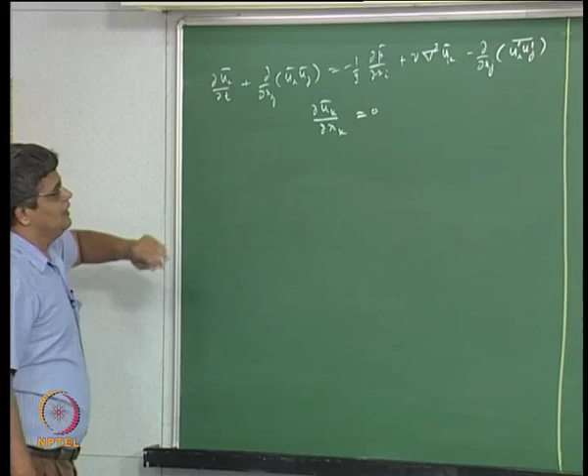When you look at these Reynolds averaged Navier-Stokes equations, we find that these are expressed in terms of the time average velocities and the time average pressure. Even the diffusion term here contains the time average velocity, so that if one were to neglect this, we would be expressing the momentum equation and the continuity equation in terms of time average quantities, and it's these time average quantities which enable us to make assumptions of steady state or one dimensionality or two dimensionality of the flow.

Now the set of momentum equations is not complete without this extra term, and for each equation there are three such terms appearing in the momentum equations. There are no additional terms in the time averaged continuity equation.

We have also made the point that these additional quantities involving the product of the fluctuating quantities cannot be neglected straight away, because for the case of steady one dimensional fully developed flow, the x momentum equation will reduce to: all the left hand side quantities become zero, equal to minus 1 by rho dou p bar by dou x, which is a constant when we have fully developed steady flow in one direction, plus nu dou square u bar by dou y square coming from this. The other quantities are zero, and the only non-zero quantity here will be dou by dou y of u prime v prime bar.

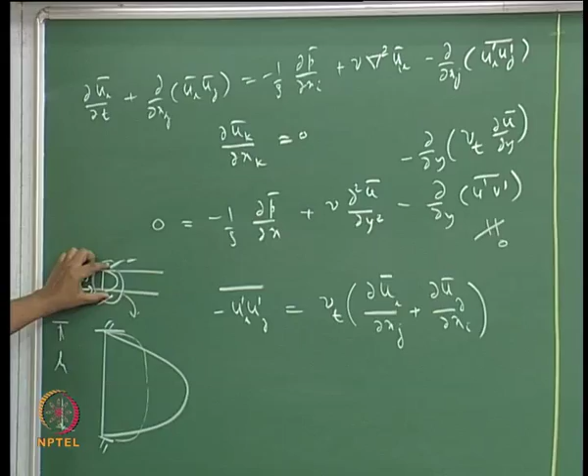Under these conditions, the equation governing the velocity profile can be written as: 0 equals minus the pressure gradient, which is a constant, some given constant C, plus d by dy of nu times du bar by dy. Since minus ui prime uj prime equals nu t times this term, with the minus included, this becomes plus nu t du bar by dy.

We notice that u is a function only of y, so we can replace the partial derivatives with total derivatives. We can say d by dy of (nu plus nu t) times du bar by dy equals a constant.

If you put minus here, this becomes a constant, which is given for driving the flow. This comes from the boundary conditions: the pressure at this end is this much, pressure at this end is this much, and the pressure difference between the two is driving the flow. So this is a given constant.

Nu is a property of the fluid, so this is known. In order to solve this, we need to know nu t, the turbulent viscosity or turbulent kinematic viscosity, which is used to model these additional terms representing the turbulent momentum flux.

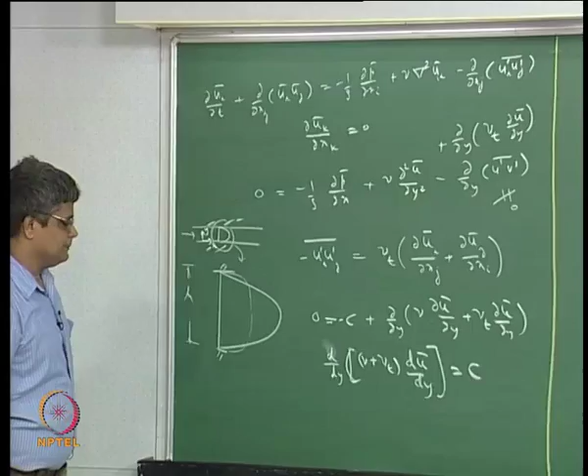Now what can we say about this nu t? We know that turbulent momentum flux adds to the momentum flux coming from viscous forces, so the overall turbulent transport in turbulent flow is greater than what we have, which we know from increased friction factor. One possibility is to say that nu t by nu is some constant C1.

C1 may be, for example, 5 or 10 or 100, whatever it is - the transport is increased by a multiplicative factor C1. This C1 is what we want to input so that the pressure gradient computed from this, or the volumetric flow rate for a given pressure gradient, matches with the experimental one.

So one possibility is to prescribe a constant value for the turbulent viscosity, such that the pressure drop versus volumetric flow rate, for example in turbulent flow through a pipe, is honored. Essentially we are increasing the friction factor by a certain multiplicative factor. That kind of thing is okay for predicting either the total flow rate or the pressure gradient, given that the other component is given.

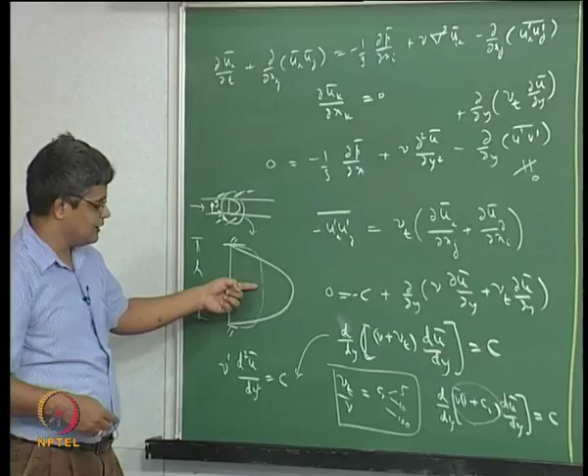So in order to go from this kind of profile to this kind of profile, we have to make nu t a function of y in this simple case, so that when this function of y acts on this profile, we will bring it back into this through this equation.

Now what kind of functional variation can we ascribe to nu t? For this we need to know more about these additional terms - these quantities. Instead of calling these quantities, let us from now on call these turbulent stresses.

These are also called Reynolds stresses for obvious reasons. These arise from time averaging as per the Reynolds decomposition of the velocity into a mean velocity and a fluctuating velocity. So these turbulent stresses, or Reynolds stresses, are being represented through this turbulent viscosity and through this kind of thing. So we need to know more about these turbulent stresses.

How can we know more about it? It is through experiments, because that empirical information of how to replace this as a function of the other variables can only come from empirical results, unless of course we take recourse to direct numerical simulation, and that is also being done to a great deal.

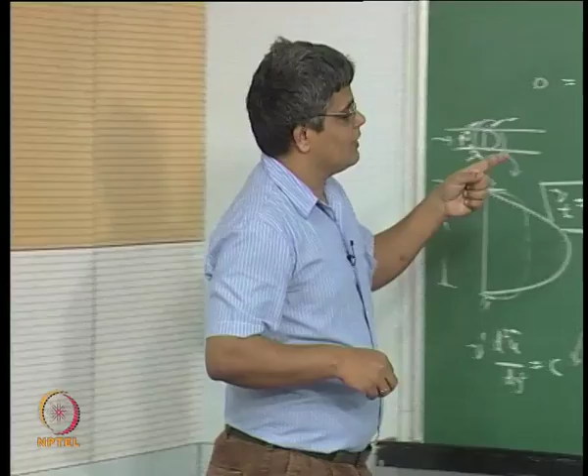So now what can we say about these turbulent stresses, ui prime uj prime, which are six in number? We are looking at a Cartesian coordinate system. So we have u prime v prime, u prime u prime, and of course u prime w prime, and then we have v prime w prime, v prime v prime, and w prime w prime.

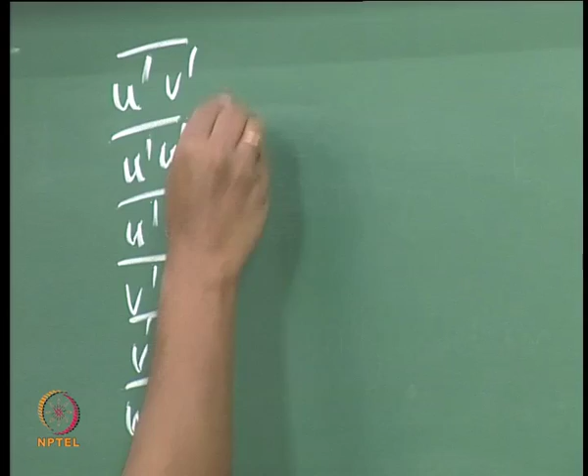There are six Reynolds stresses or turbulent stresses, and we would like to know how each of these varies in the general case with x, y, z, for a steady flow, because these are time-averaged quantities. These will be steady if the turbulent flow is steady, in the sense that the time-averaged flow parameters are steady.

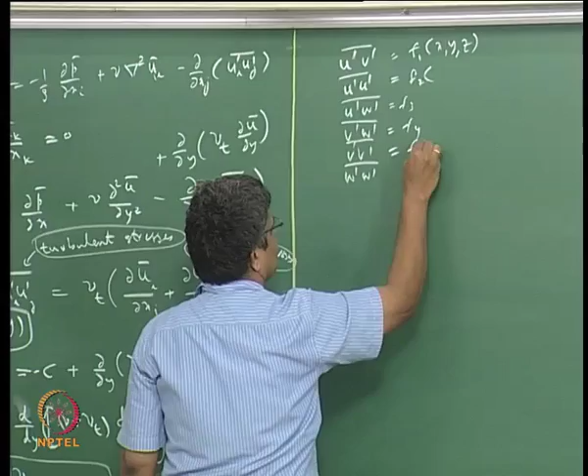So these are functions of x, y, z only if the flow is steady. So we will consider the steady case, and there is no reason to believe that all these are the same functions of x, y, z. So you have F1, F2, F3 like this, and these are what we need to know in order to replace these things coming in the momentum equations.

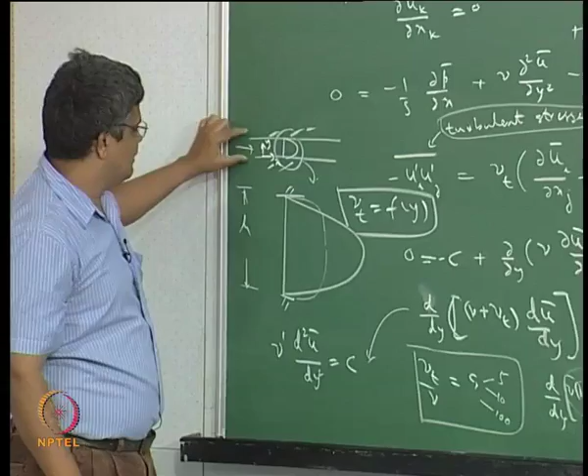Measurements tell us that the variation of these quantities, even in very simple flows, is very complicated. So the spatial variation of this, for example, if you take the simple case of fully developed steady flow between two parallel plates separated by a distance, in which the flow is being driven by a constant pressure gradient, you can plot these turbulence stresses as a function of y, the distance from the wall, and typically the stresses will exhibit a variation like this.

Most of these quantities, the normal stress components, these three will exhibit a variation like this, and you can see that it is not a simple variation like linear, second order, or exponential. Those kinds of simple variations are not there, because it is going through a peak and then coming down.

What is also very important is that if you were to look at the spread of this as compared to the channel width, y by h, then this peak occurs very close to the wall—it depends on Reynolds number, but it may be as low as 0.01. So within a small distance from the wall you may have a large peak, and then it behaves like this, and this is for one of these quantities, and another may be like this.

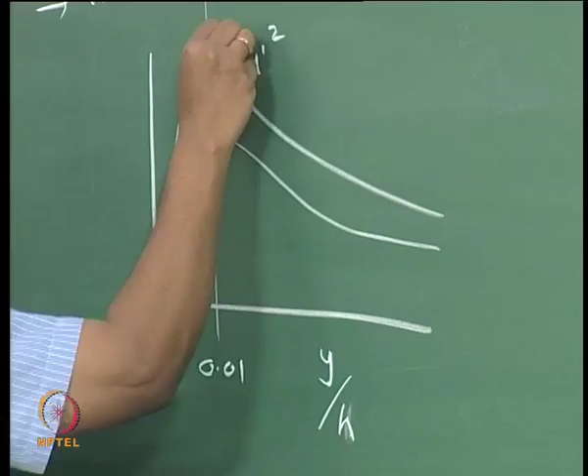So this may be u prime square bar, where u is in this direction—this is x, this is y, and this is z—and we are talking about a region very close to the wall, because we are talking about y by h of the order of 0.01, 0.05 like this, and the variation is not as simple as this.

This may be the variation of w prime square, and this is of v prime square. So that means all of them go through a peak, and then, as you go further and further away from the wall, they achieve an almost constant value. The magnitude of these quantities, on a non-dimensional basis, may be fairly small—of the order of 10 to 15%.

So what we are looking at is u prime RMS by u mean, where u mean is the average velocity through the duct, is of 10 to 15%, and this may be lower, and this is even lower. What we find is that there is a strong effect of the wall in this region, but as you go further away from the wall, it makes the turbulence more isotropic, in the sense that the three normal components have more or less the same magnitude, which may be of the order of 0.02 or so.

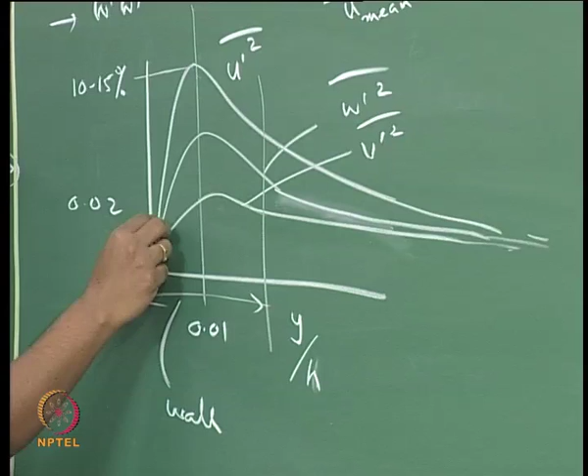So even for the simplest cases like one dimensional steady flow, very close to the wall, we find a variation which is fairly complicated. What we are interested in, what comes into the momentum equations, are not the values of u prime square and so on, but the spatial gradient of these, that is dou by dou x and dou by dou y of these quantities. Very close to the wall, all of them tend to go down to 0, and in that sense they exhibit a complicated variation.

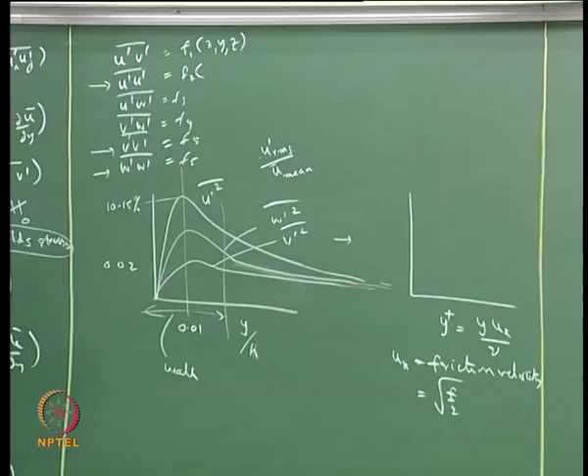The same plot is usually put not in terms of y by h, but in terms of y plus, defined as y u star by nu, where y is the normal distance from the wall and u star is known as the friction velocity, essentially the square root of f by 2, where f is the friction factor, such that f equals 16 by Reynolds number in the case of laminar flow. I would refer you to standard books on fluid mechanics and turbulent flow for this.

In such a case, what we find is that the peaking of these stresses occurs for y plus of around 10 to 15, and then it goes on like this. A typical maximum value of y plus, as you go from the bottom wall to the center, depends on the value of the friction factor. u star by u mean is square root of f by 2. As the Reynolds number increases, u star increases, but typically this maximum value may be around 5000 or several thousand, maybe 2000 to 10,000 or even higher.

So you have a very strong gradient of these stresses very close to the wall, and they exhibit highly nonlinear behavior in a small region, which is very difficult to capture in a CFD type of solution, because we normally use first order or second order accurate methods, and the accuracy is very sensitive to the actual gradient of the quantity.

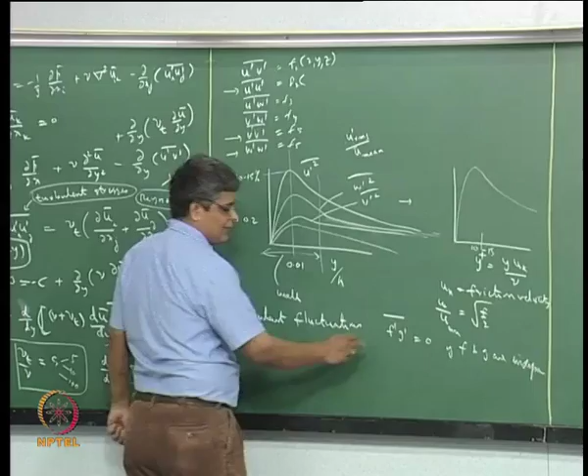Measurements show that not only are the normal stress components not 0, but even the off-normal stress components are not 0. So turbulent fluctuations are such that f prime g prime bar are not 0, and in a non-dimensional way they can be as much as 0.3. The cross correlation coefficient can be as high as 0.3 under certain cases, meaning there is some linkage between the fluctuation in u and the fluctuation in v, and similarly between v and w.

This linkage has to be captured by us in order to make this model. So what is this linkage? The linkage is such that a turbulent flow typically has a high degree of vorticity. It is not irrotational, it is highly rotational, which is a fluid mechanics way of describing this.

So turbulent flow is highly rotational, and in a pictorial way one can imagine as the flow goes through this duct, it is not going in streamlines, in straight paths. The fluid has these eddy-like structures, small whirlpools spread throughout the flow domain, and a particular particle, instead of going straight through, may go like this and then go off, then go like this, then go off like that.

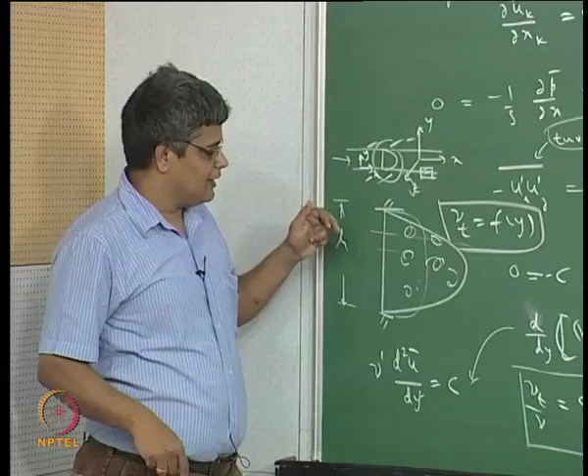So a fluid particle is not following a straight path in turbulent flow, it is taking a path which is highly irregular but has a strong degree of rotationality, and this rotational element is not there all the time, and it is not always small. It may be part of a bigger rotation or a smaller rotation, and it may undergo the rotation only for a short time or for a long time.

So typically what we express is that there are eddies, or small whirlpools, that a fluid particle encounters as it flows through in a turbulent flow, and these eddies are the cause, result, and the sum and substance of these turbulent flow correlations, because these eddies are fluctuating in the sense that they are formed, then they grow, then they decay. So they represent, in a way, the characteristic of turbulent fluctuations.

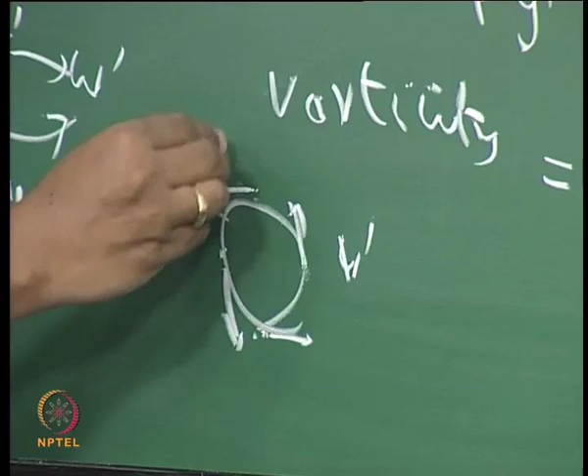For an eddy to form, a fluid particle here must go like this, and the fluid particle here must go like this, and a fluid particle must go like this, so that you can have an eddy-like structure. This means the v prime fluctuation here and the u prime fluctuation here must be correlated, so that as this moves, this moves. It is not exactly perfectly correlated, but on the whole one can see that for eddies to be present, there has to be some sort of correlation between u prime and v prime at several points.

At points within this, and also at the same point from time to time, and that is why these turbulent stresses, f prime g prime over bar, are not equal to 0. So the fact that this is not 0 substantiates an eddy-like structure in turbulent flow, and we must capture this. An eddy means that the fluid which is here is being mixed by convection with eddy from here, with the fluid here.

So this element will go quickly into this, and then it will mix and exchange the properties that it has. The property exchange between a fluid particle at this location and at this location can now come about, because these two fluid particles are brought together by convection, by the macro movement of the fluid particle from here to here in the turbulent eddy.

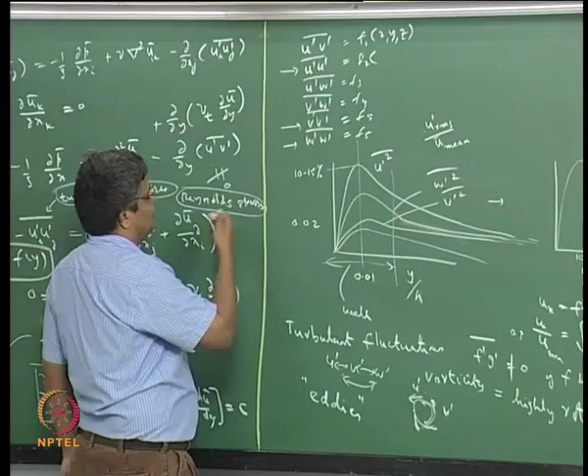If this were not the case, as per molecular mechanism, if the property of the fluid element at this point has to be exchanged with the property of the fluid element here, it is only possible through viscosity - this particle exchanges with this particle, and this particle exchanges with this particle, and so on. So it goes through several particles and several interactions before it can effectively interact with this. So there are a lot of middlemen between this trader and this trader in exchanging goods.

In trading goods, whereas in turbulent flow you are creating a railway path so that these people can travel up to this and then exchange goods. So the exchange and trading of goods between this particle and this particle is faster because you have laid a railway track and it is easy for them to go. You do not have to go through lots of middlemen who are exchanging and taking a long time.

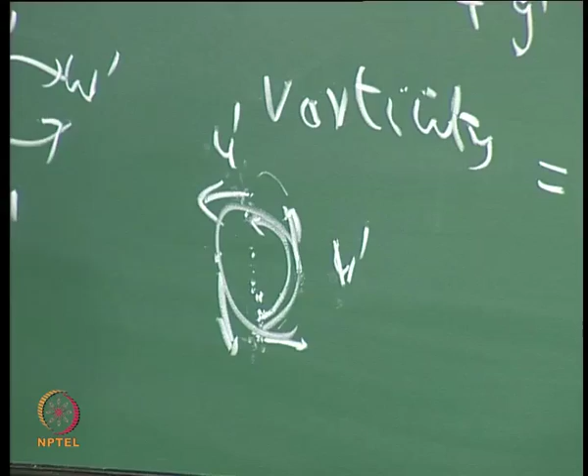So this is why the exchange of momentum and heat and all those things, the flux associated because of these differences, is much faster in the case of turbulent flow, and that arises from the fact that these eddy type of structures are present.

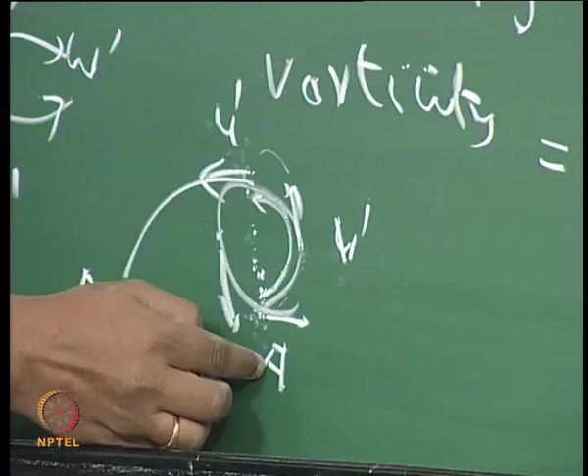Another characteristic of turbulent flow is that not only are there eddies like this, but eddies of different sizes are there, and it is these eddies of different sizes which actually give rise to effective mixing. For example, if you are looking at point A here and point B at this point, these two have to be mixed, and we are talking about for example a chemical reaction which happens at molecular rates, molecular distances.

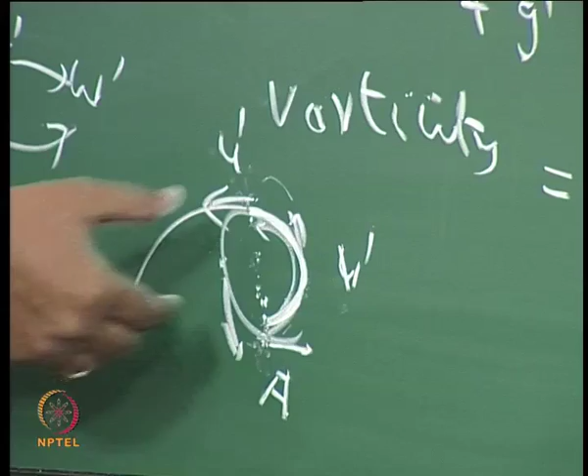Then this can mix, so all the fluid particles in this band along this sort of railway track will mix easily, but there is no mixing of this fluid particle with this fluid particle. So if you had only an eddy of one size, then mixing would happen only up to a certain length scale, and beyond that it has to depend on molecular mixing arising out of molecular collisions.

Whereas in turbulent flow you have eddies of this size, eddies of this size, eddies of smaller size, smaller size, right down to very small lengths, and the smallest length is determined effectively by the rate of dissipation of turbulent energy. It is determined by the action of viscosity on preventing those kind of very small fluctuations, and the largest size of the eddy is determined essentially by the physical dimension, the characteristic dimension of the flow domain - for example, the pipe diameter in the case of a circular pipe, or the distance between the plates in the case of flow between parallel plates, and typically the ball diameter in flow over a sphere.

So these are the characteristic sizes, characteristic linear dimensions, and the largest eddy size is typically a significant fraction, maybe 10%, 15% of the characteristic size of the overall domain, whereas the smallest eddy size is characteristic of the amount of dissipation of this kinetic energy associated with these fluctuations. That is, this plus this is a sort of kinetic energy of the turbulent fluctuations, and the rate at which that is being dissipated will govern the smallest eddy size.

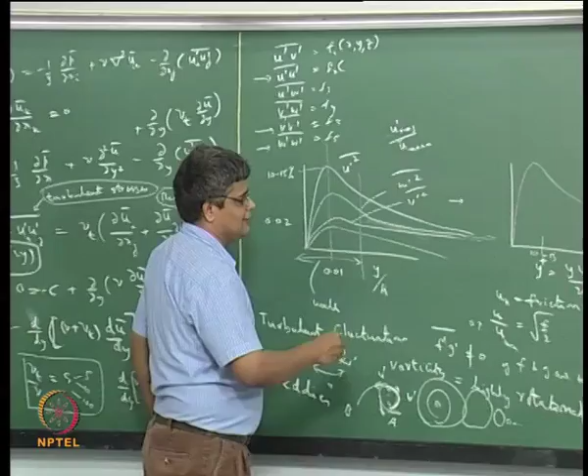Now what we want to say is that because you have an eddy of this size but also an eddy of this size and this size, mixing will happen not only at this length scale but also at this length scale, and also at this length scale. So that means mixing can happen right down to very small scales, and that is when we have true mixing. Otherwise, if mixing is caused only by one big eddy, then mixing will happen only in that band.

There won't be mixing between this particle and this particle. But if I have mixing not only like this but also like this and like this, I can see mixing happening over this, and these eddies are being convected by the flow - they are not stationary eddies. So this mixing that is happening here will transport further downstream, and that also causes mixing. And not only that, eddies of a particular size do not remain like that - they grow to a certain size and then they decay.

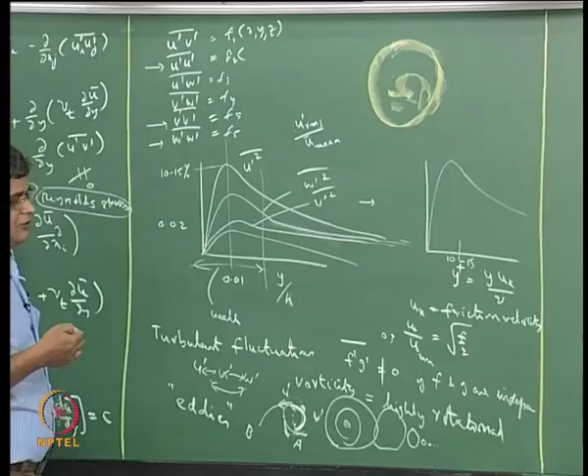Okay, so there are particular mechanisms by which eddies of certain size are created, and these eddies will slowly decay in size and then they go away. So you have a characteristic lifetime of an eddy and a characteristic size of an eddy, and these are random type of eddy structures which are continuously being created and destroyed, and which are exchanging energy with each other.

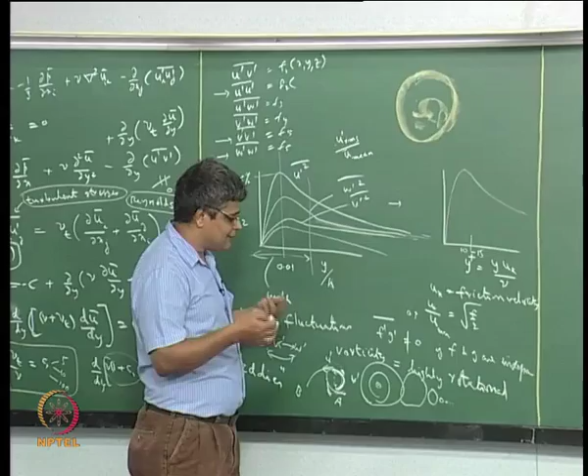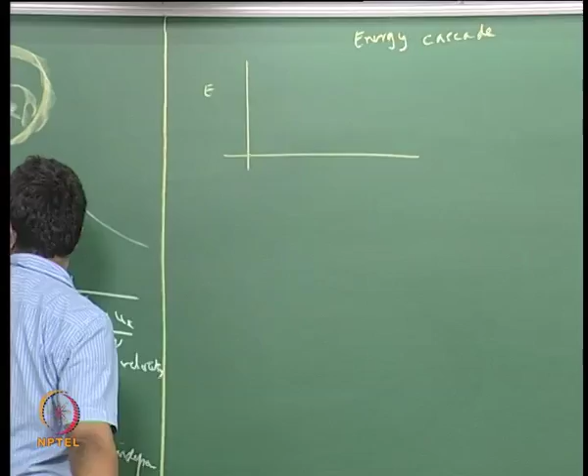And so this kind of thing is expressed very nicely in a pictorial form, in the form of energy cascade, which is very characteristic of turbulent flow. What we are plotting here is the energy, and this energy is turbulent kinetic energy.

And what we mean by turbulent kinetic energy is this energy is proportional to half of u prime square bar plus v prime square bar plus w prime square bar. So that is the kinetic energy associated with turbulent fluctuations.

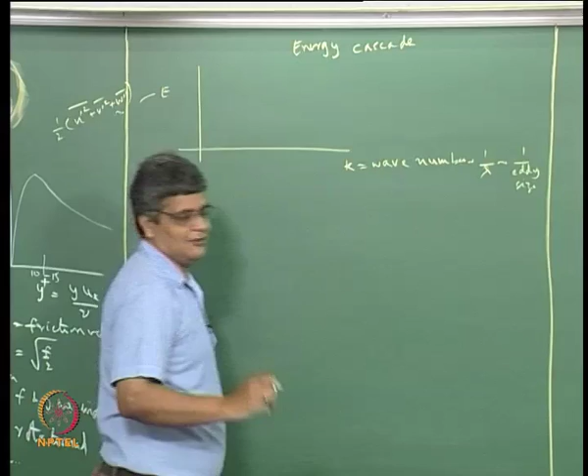So one can say that, and what we have on this side is either the wave number, which is proportional to 1 by lambda. So this is proportional to 1 by eddy size. These are not mathematically rigorous definitions, and one can look up standard textbooks to get a much better idea. But the essence of this is that when you have a large value of k, that means very small eddy size, and when k is very small, then you have large eddy size.

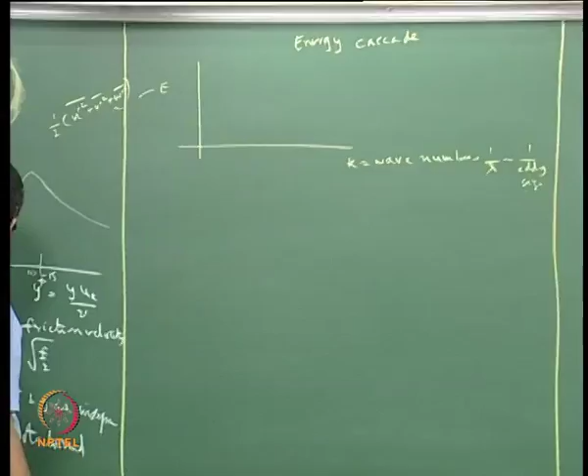So the largest eddy is fixed by the characteristic dimension of the domain, and if L is the characteristic length of the domain, then typically L by 6 is the largest eddy size, and you have the k minimum.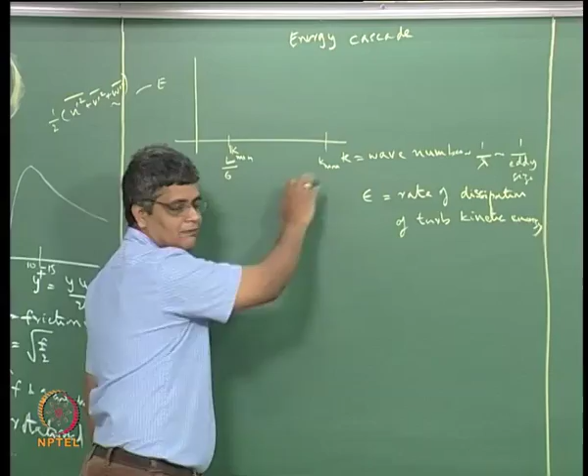This is fixed by the characteristic size of the domain, and then at the upper extreme you have k max, which is fixed by the rate at which this turbulent kinetic energy is being dissipated, usually given the symbol epsilon. So this is the rate of dissipation of turbulent kinetic energy. There are proper definitions for this, and we will get back to these things, but the higher the rate, the higher is the value of k max, or the smaller is the eddy size that is possible.

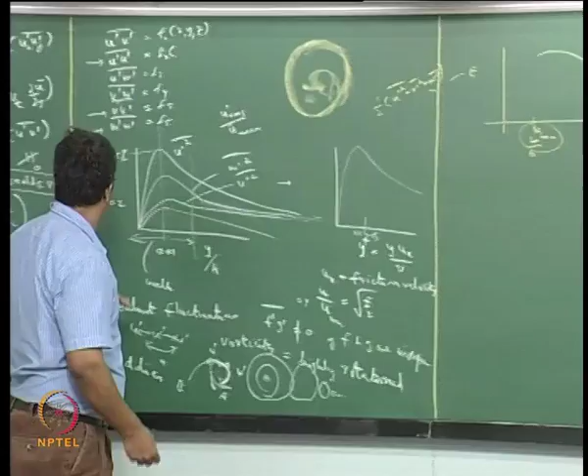So in between, the characteristic energy varies like this. The turbulent energy is produced by these large eddies, which are characteristic of the instability mechanisms happening in high shear regions. That is, high shear regions where you have large gradients of the mean velocity, which typically happens close to the wall. So that is why very close to the wall you have large values of this turbulent kinetic energy here, of the order of within 1% of the total characteristic length or duct size. So that is where most of the turbulent kinetic energy is produced, and then it is cascaded down in a characteristic variation.

This is a log plot, log of E and log of K. It is cascaded, transferred from the large eddy size to the next size, next size, next size, right down to the smallest eddy sizes. And when you come close to this k max, it is no longer possible to sustain these eddy sizes, and you have too much viscous dissipation of this fluctuation. Beyond this you do not have any fluctuations or energy associated with this. So this is the energy cascade.

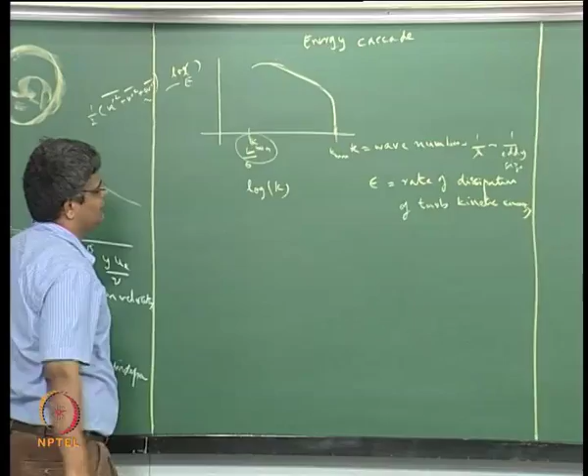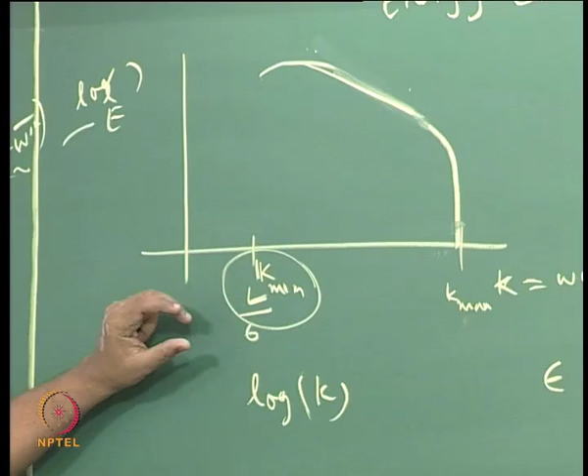So turbulence, the energy associated with turbulent fluctuations, is produced by eddies which are characteristic of the length size, of the order of the characteristic length of the flow domain, through mechanisms, instabilities which are created very close to the walls. These are called ejections and sweeps, and those kinds of phenomena which are taking place in turbulent flow. Although this is an instability, there is also a self-regulating mechanism by which this instability does not go into uncontrollable system behavior.

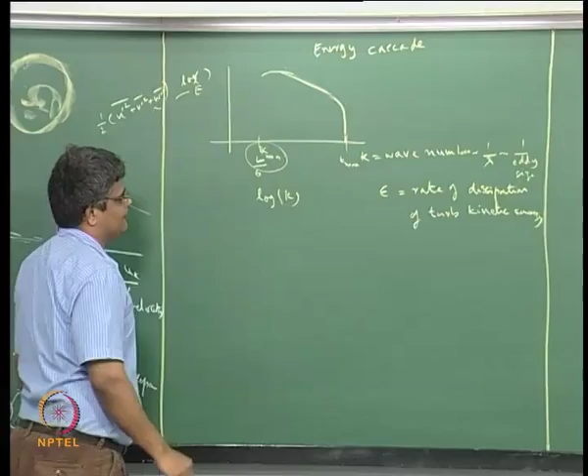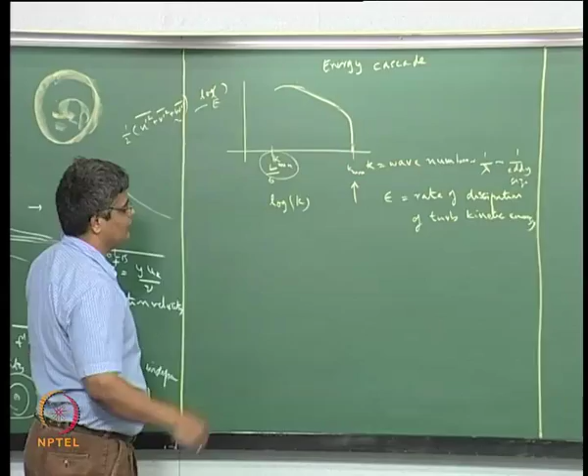So it is produced here, and then it goes down to the smallest length here. So it is this presence of the eddies and the exchange of momentum between eddies of different sizes which is characteristic of the energy cascade, and one can therefore say that if one were to characterize turbulence, then one possibility is to look at the lowest eddy size that can survive in the turbulent flow against viscous dissipation, and on the other side of the spectrum you have the largest eddy size which is characteristic of this.

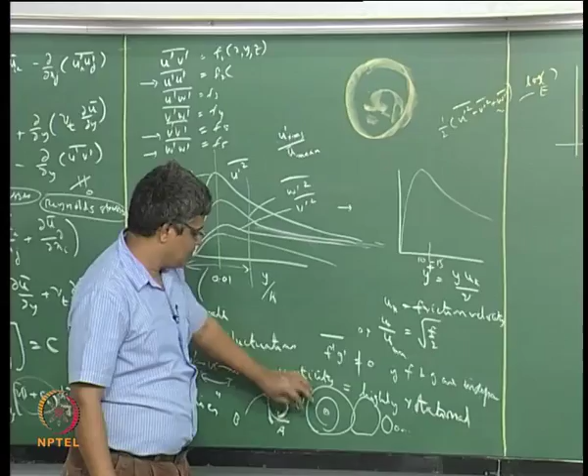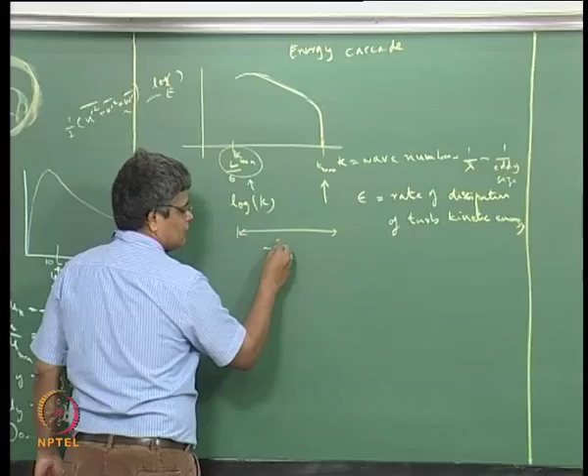So these are two reference points which essentially determine the range of eddy sizes and the characteristic features causing high turbulent transport of mass, momentum and energy in turbulent flow conditions. Typically for fully developed turbulent flow, for example Reynolds numbers of the order of 50,000 or higher, this variation can span a few decades - this can be of order 10 to the power 3, and this can be 10 to the power 6 or even higher. So K max by K min is of the order of 10 to the power 3, and similarly energy max by energy min may be of the order of 10 to the power 6, which essentially corresponds to measurable things like this.

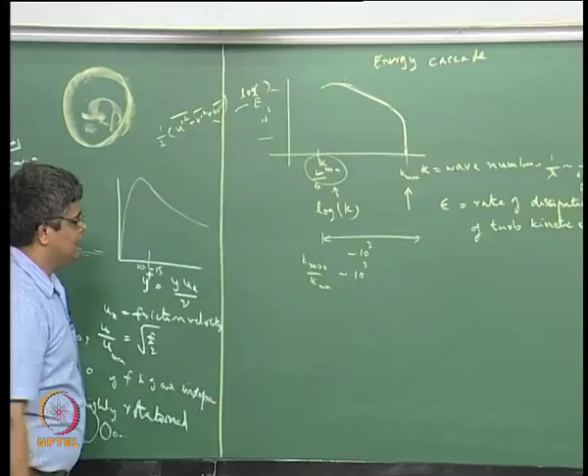What is especially important is this range here - that means fluctuations are possible of this kind. We've said this is the wavelength of the fluctuation, which is also loosely representative of the eddy size. So you can have wavelength of fluctuation associated with lambda max or K min, and you also have fluctuations associated with the smallest things, associated with lambda min.

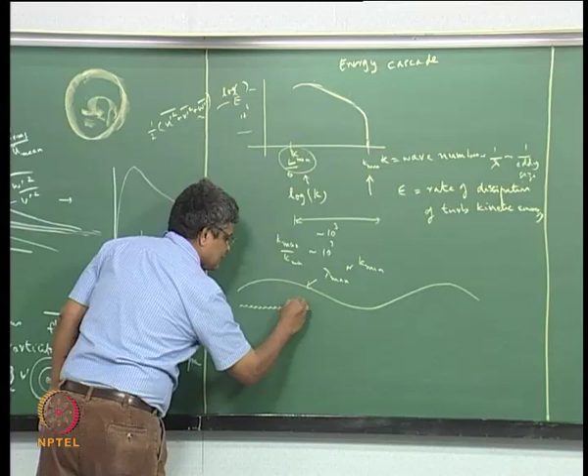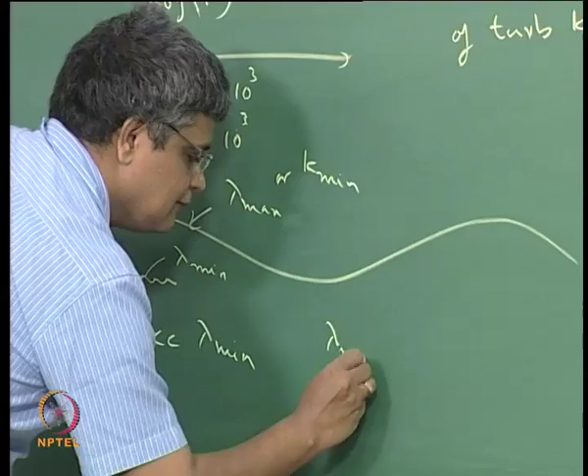Now if you want to do a proper turbulent flow calculation which captures the full range of turbulent fluctuations from the smallest size to the largest size, you must have a grid spacing much less than this lambda min - your delta x must be much less than lambda min. And we know that lambda max by lambda min is of the order of 1000, so the number of grid points to capture these variations may be of the order of 10,000.

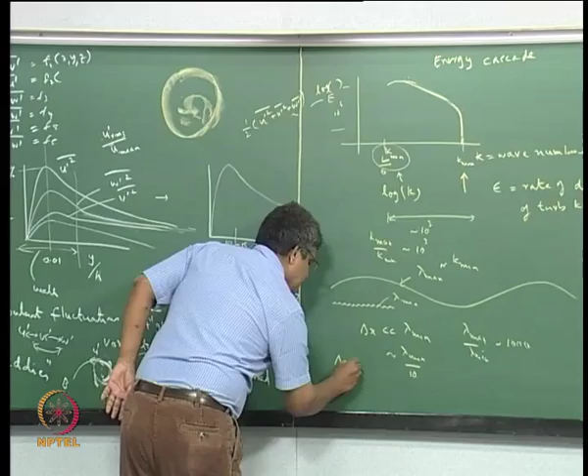Because if delta x must be less than this, say delta x is lambda min by 10, then the number of grid points in one direction itself is 10 to the power 4 to faithfully capture all these fluctuations. And we know turbulent flow is 3-dimensional, so in the x direction you have 10 to the power 4 points, y direction 10 to the power 4 points, and z direction 10 to the power 4 points.

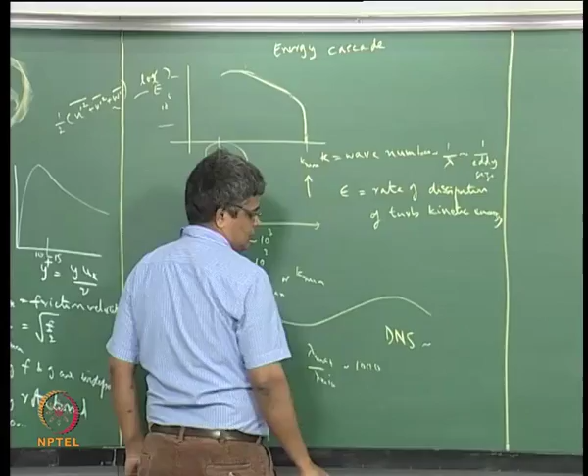So the number of points is humongous to capture highly turbulent flows, and that is why these kinds of computations are very, very difficult to be done for highly turbulent flow calculations with very large Reynolds numbers. The DNS, that is direct numerical simulation, where we solve the unsteady form of the 3-dimensional Navier-Stokes equations with small delta x and all these things, is typically carried out for Reynolds numbers of the order of 30,000 - I think it has gone up to 30,000 or maybe 50,000, of that order.

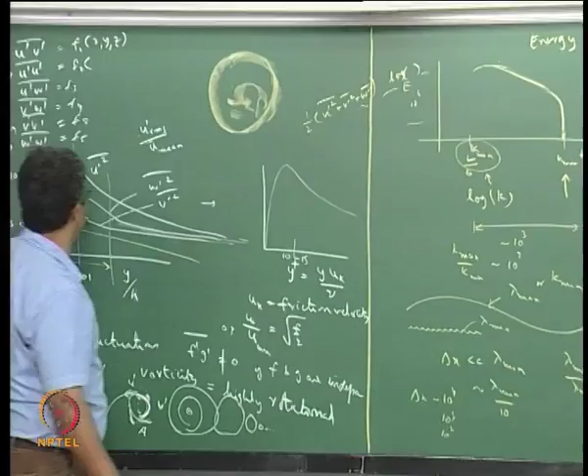Okay, so now we want to come back to the prescription of how these things vary, the functional variation of these things. Having seen the complexity of turbulent flow, in the sense that there are highly spatial variations based on measurements and highly temporal variations in the form of eddies of vast range of sizes which are produced and are continuously getting bigger and smaller and exchanging with all kinds of things, therefore exhibiting highly temporal fluctuations.

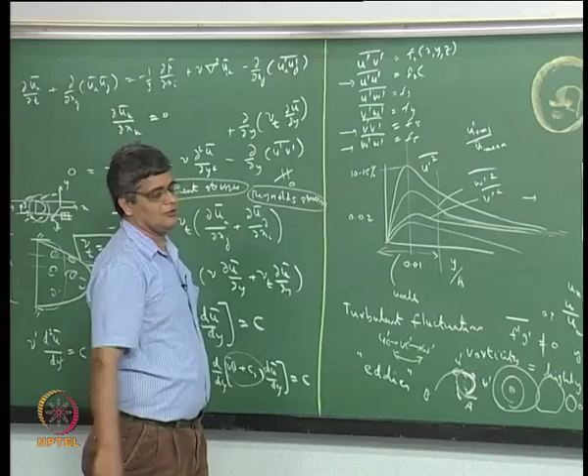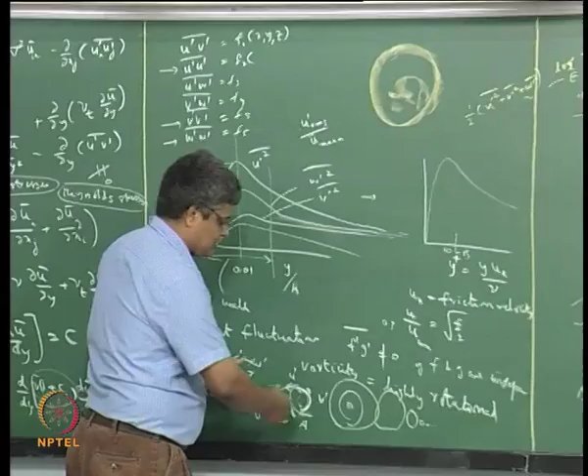We can say it is not possible to come up with a very exact description of these turbulence stresses. So people have tried to capture the essence of these things, the nature of the turbulent flow and the mixing it causes, through simplest prescriptions in the form of an effective viscosity, effective turbulent viscosity, which is causing these turbulence stresses. In this particular case they are abandoning any attempt to make these fluctuations realistic in the sense of the turbulent flow characteristics present here, in the form of eddies and all that. That particular thing is essentially being subsumed in the definition of an equivalent turbulent viscosity.

A very simplistic picture for the justification of this turbulent viscosity is presented: the presence of these eddies of different kinds is equated to the presence of molecules as per the kinetic theory of gases. Just as in gases the molecules interact, collide with each other and exchange momentum, it is also said there is a possibility of a similar kind of mechanism in the form of interaction of these eddies that gives rise to a viscosity.

That kind of mechanism is what is thought for this turbulent viscosity. The simplest generic model for this has been proposed by Prandtl in 1925, and for the simple case of one-dimensional flow that we have here, he proposed what is known as a mixing length model.

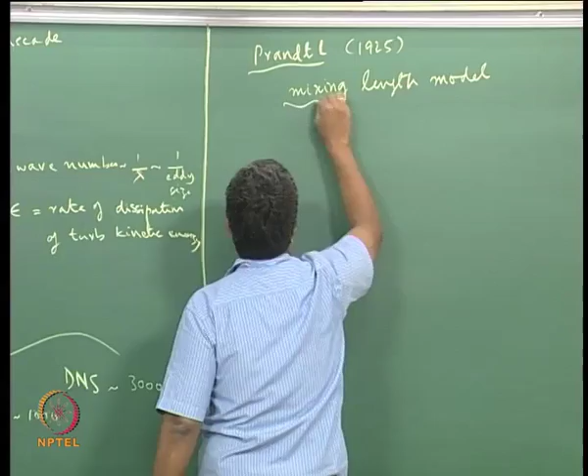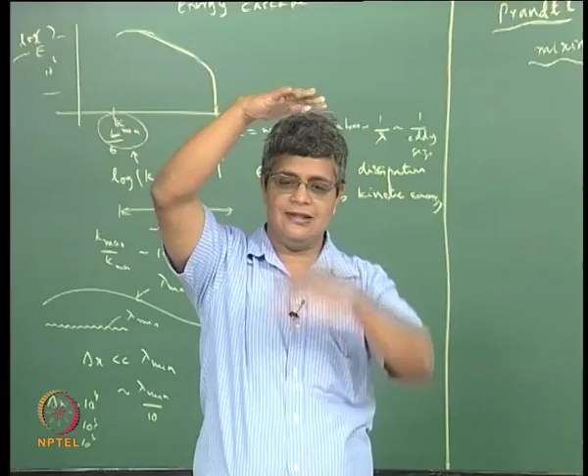There are probably several interpretations to this, but the simplest way is to say that the fluctuations observed at a particular point are because fluid molecules from different parts are being brought to that point. If you have a flow with this channel dimension, you have a velocity profile. We know that very close to the wall it has to have low mean velocity, and as you move away from the wall you have higher and higher velocity.

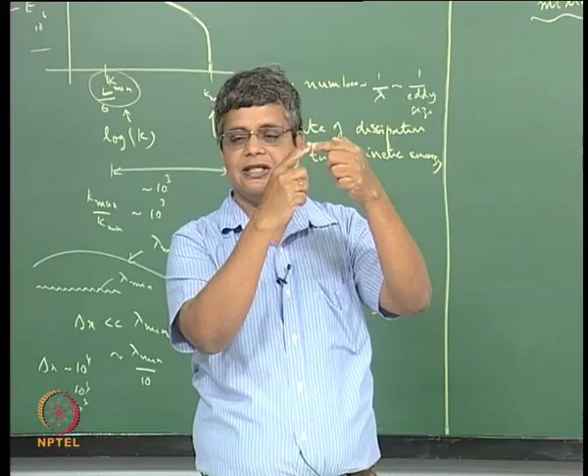Now the nature of turbulent flow is such that there are eddies, because of which mixing of fluid elements from different heights takes place, and that is the reason why fluid with a lower velocity can come to a region of high velocity and exchange momentum. So if you are measuring the velocity at a particular point, sometimes you are measuring the velocity of a fluid element which is originally there, with a mean momentum associated with that height. Sometimes you are measuring the velocity of a fluid element brought from a different place, and if it is brought from a place where the velocity is lower, you record a lower velocity, and if that fluid molecule is brought from a zone of higher mean velocity, you record a higher velocity.

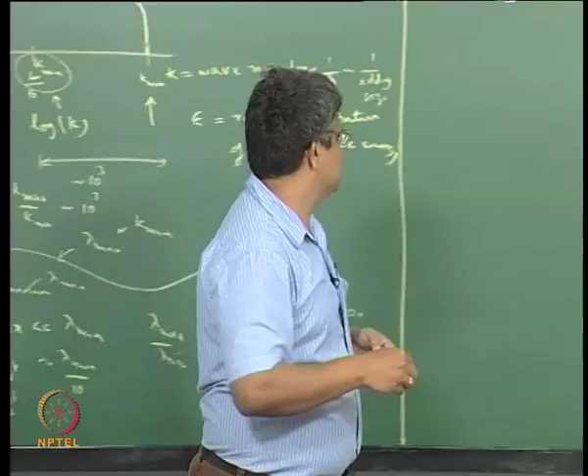So the velocity fluctuations recorded at a particular point are because fluid elements with different velocities are being mixed by the turbulent eddies that are present. Therefore, if you take a velocity profile like this, the mean velocity as a function of y is plotted here, and this is the normal distance from the wall. At the wall you have 0 velocity, and as you move away from the wall the velocity increases like this.

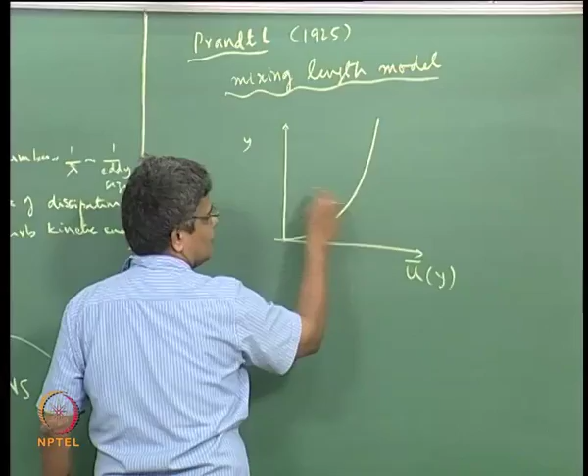Let us say you are making a velocity measurement at this particular y, let us say at y1. So the expected velocity is u1. If you plot as a function of time the measured velocity at y1, it is going to show oscillations like this, and the mean velocity is u1 bar at y.

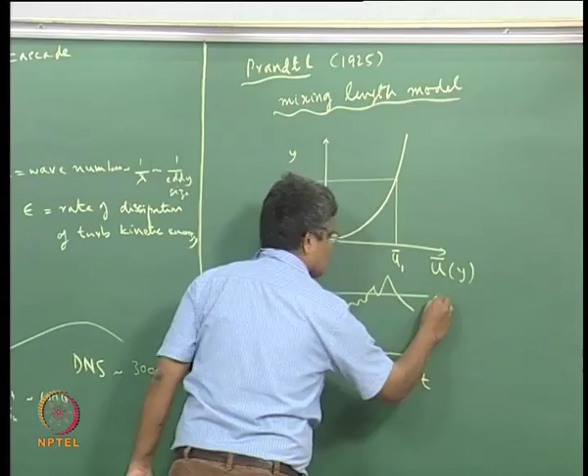So this is the expected velocity, but at different times you are measuring this velocity, this velocity, this velocity, like this, and the idea is that the velocity here is lower because the fluid element at that point has come from a lower height which had a lower velocity, and at this point you are measuring a high velocity because this fluid element has come from maybe a higher velocity region. So the fact that in turbulent flow fluid elements are enabled to move across different layers by these eddy structures can give rise to fluctuations.

So if a fluid element has come from a lower position here, the velocity you are instantaneously measuring is roughly the velocity at this position, u2, and if it is coming from say y3, the velocity you are measuring is the mean velocity associated with that position, that is u3. So the fluctuation you are measuring is characteristic of the distance from which these fluid molecules are being brought here, and also the velocity difference, velocity defect, or extra velocity that is there for the fluid molecules at those distances.

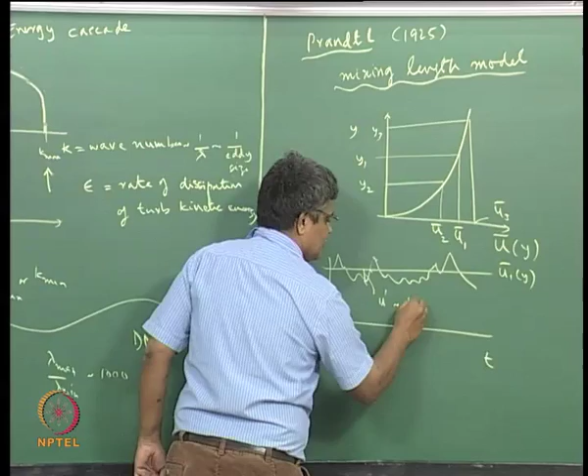So you can say that if the fluid molecule is coming from y2, the instantaneous u prime you are measuring is u2 minus u1 bar, and the velocity fluctuation, the velocity difference between the mean velocity expected here, is u3 minus u1 bar. So the velocity fluctuation, the deviation from the mean value, is because the velocity you are measuring belongs to a different place, and it is being brought here and getting mixed. So you can say that u prime is delta u.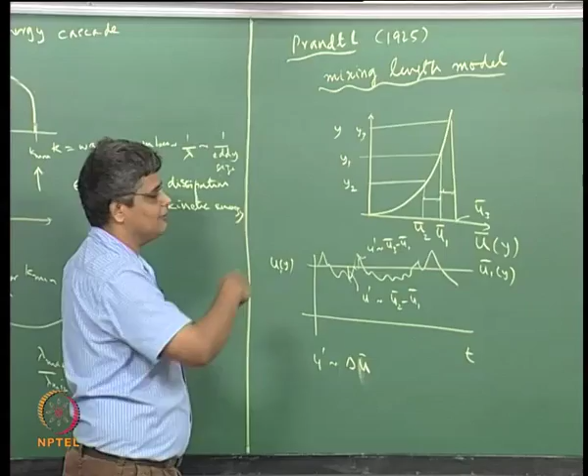Okay, so delta u bar, where delta u bar is this one or this one, and it can be both positive and negative depending on whether it's coming from the bottom or the top.

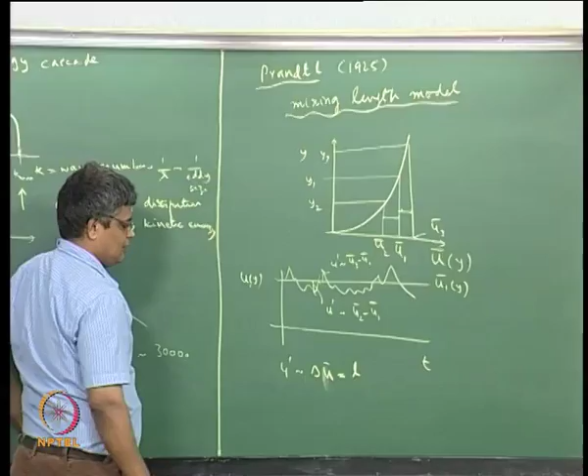Essentially you are saying that on a time average basis you are measuring points coming from below or above. This delta u bar can be given by a mean distance over which the fluid elements are being brought forward. So it is a characteristic size of the eddy times the velocity gradient. We can write this as L du bar by dy, where L is the mixing length.

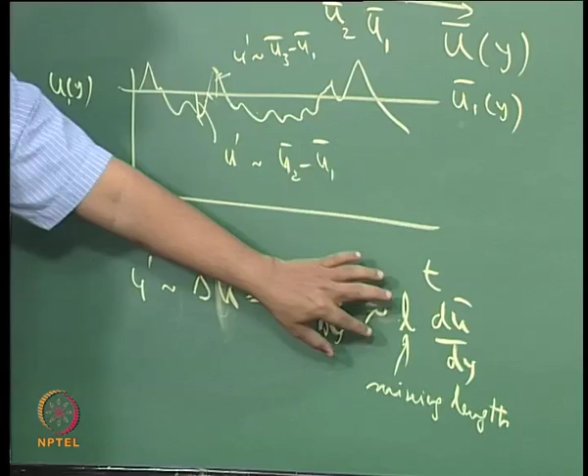So he attributed the velocity fluctuation to a characteristic mixing length which represents the characteristic eddy size, a single eddy size which is representative of the net effect of this large range of eddy sizes, and to the velocity gradient that is present here.

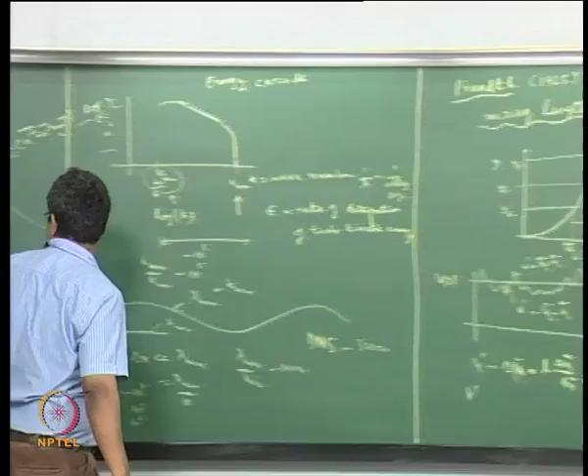And of course we have u prime and also v prime, but we know from measurements this u prime and v prime are not very different. So u prime is of the same order as v prime, but we notice that when v prime is positive...

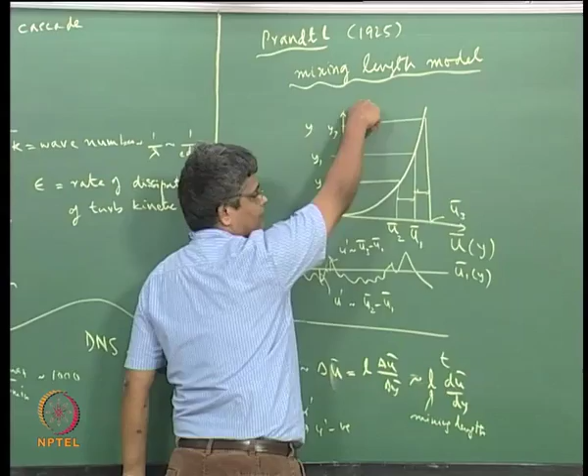That means a fluid molecule has a vertical velocity, so it is coming from a lower height to this height, which means u prime will be negative since delta u is measured as negative. So when v prime is positive, u prime is negative. And when v prime is negative, it must be coming from above - when it comes here you record a positive delta u.

So when v prime is negative, then u prime is positive. So that means the correlation u prime v prime is going to be negative, roughly speaking. It is not an exact thing.

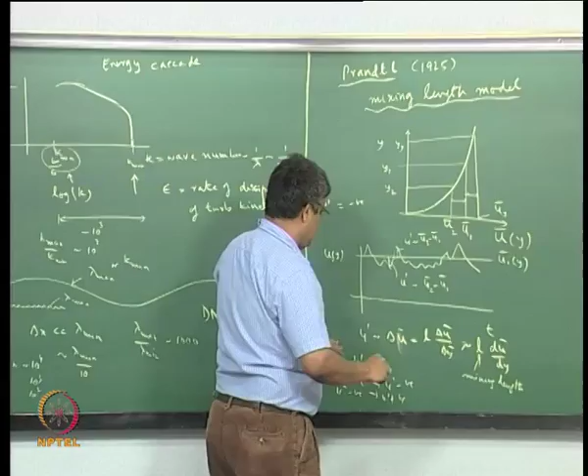Based on these things he said that minus u prime v prime is L du bar by dy, which is the velocity fluctuation u prime, and this is also of the same order, so again L du bar by dy. So this is L square du bar by dy whole square.

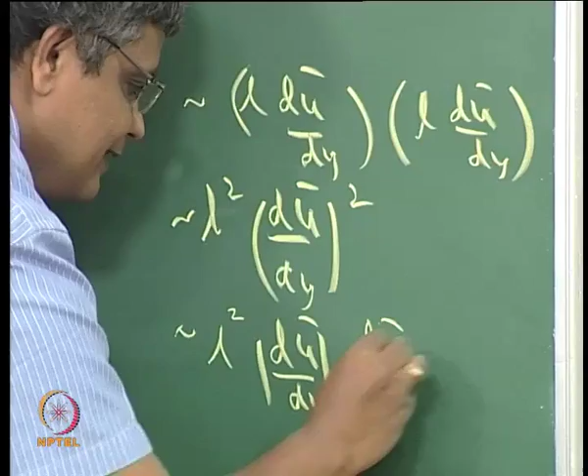And to account for all possibilities we put this as L square times the modulus of du bar by dy, times du bar by dy like this, so that if the velocity profile is not like this but in a different way, then even then this can work.

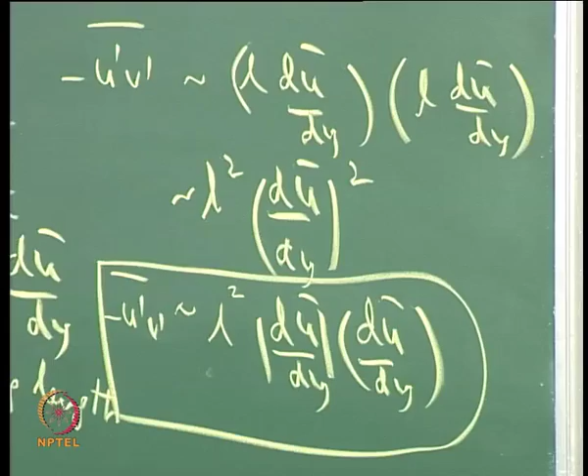So essentially you have an estimate for u prime v prime which is expressed as a characteristic mixing length times the velocity gradient, and he suggested based on fitting and other considerations that mixing length is proportional to k times distance from the wall, this proportionality constant being of the order of 0.4.

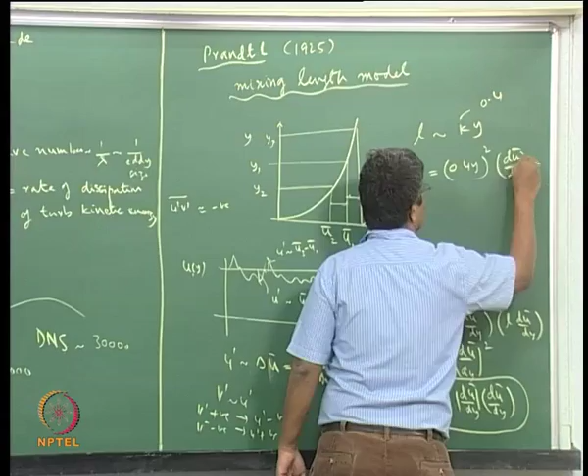So you have an overall expression for u prime v prime which is 0.4 times y whole square times du by dy, modulus times du by dy. And this here is a characteristic turbulent viscosity. So you can say that minus u prime v prime is nu t times du bar by dy, where nu t is 0.4 y square times the modulus of the velocity gradient du by dy.

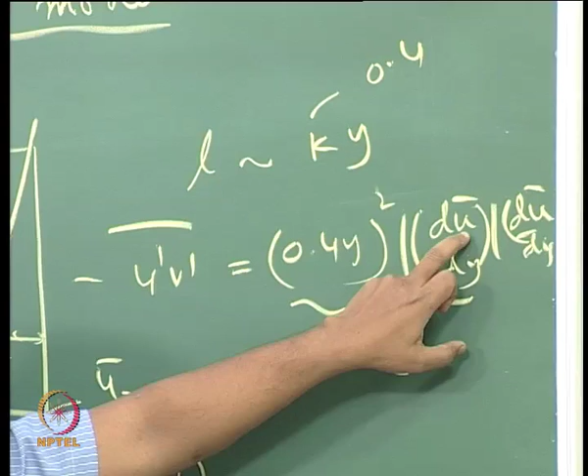You can see that this expression satisfies the requirement that nu t has to be a function of y. It is a function of y because it contains y itself, it contains y square, and it also contains the local velocity gradient. We now have an expression for nu t which does not require any more information - it involves y, which is an independent variable, and it involves the gradient of the known velocity. So once you substitute this into the expression here...

We have a single equation and a single unknown. We have closed - we have overcome the turbulence closure problem in the simplest case.

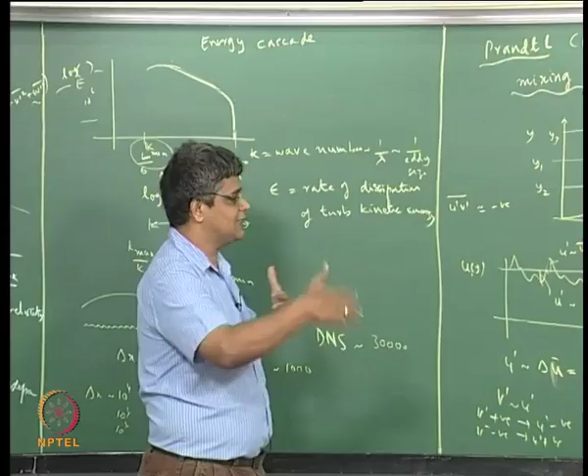So this mixing length model is one model which is based, to some extent, on the physics of what happens in turbulent flow, which is that mixing is caused by the fact that fluid molecules are enabled to move across different layers, and in the process they bring about an exchange of momentum, which is encapsulated in this. It has limitations and it has advantages which we will examine in the next lecture.